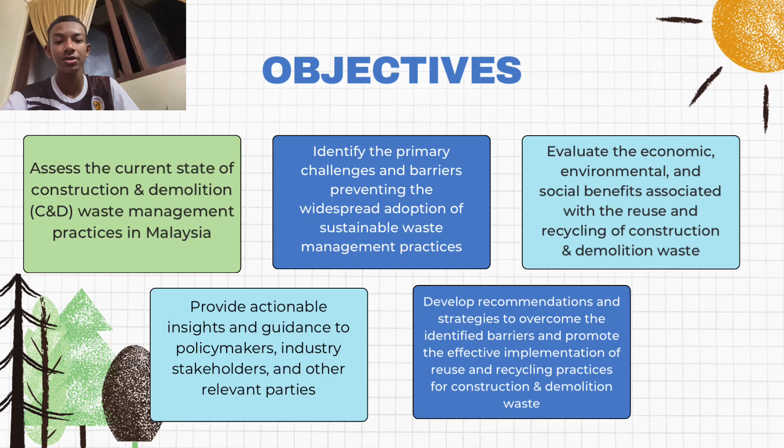The third one is to evaluate the economic, environmental, and social benefits associated with the reuse and recycling of construction and demolition waste. The fourth one is to provide actionable insights and guidance to policymakers, industry stakeholders, and other relevant parties. And lastly, to develop recommendations and strategies to overcome the identified barriers and promote the effective implementation of reuse and recycling practices for construction and demolition waste.

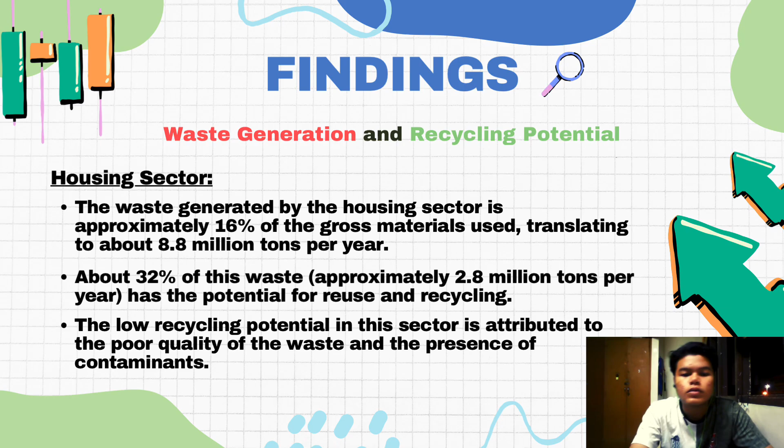The low recycling potential in this sector is attributed to the poor quality of the waste and the presence of contaminants. For high-rise building construction, the sector generates more than 10 million tons of construction waste annually, representing about 70% of the total construction waste. There is a high potential for reusability and recycling in this sector.

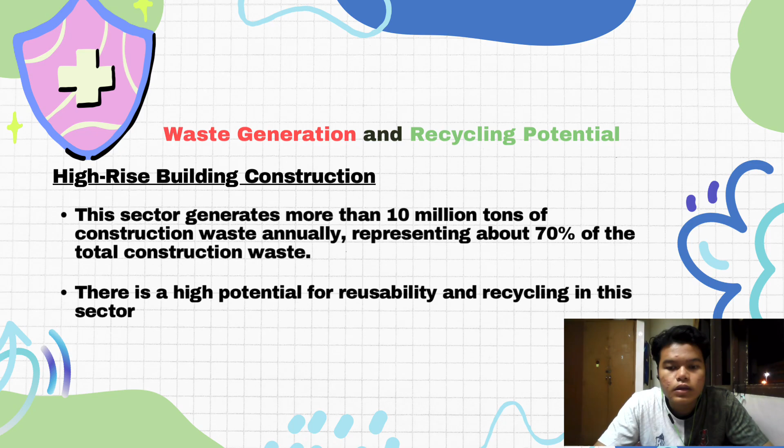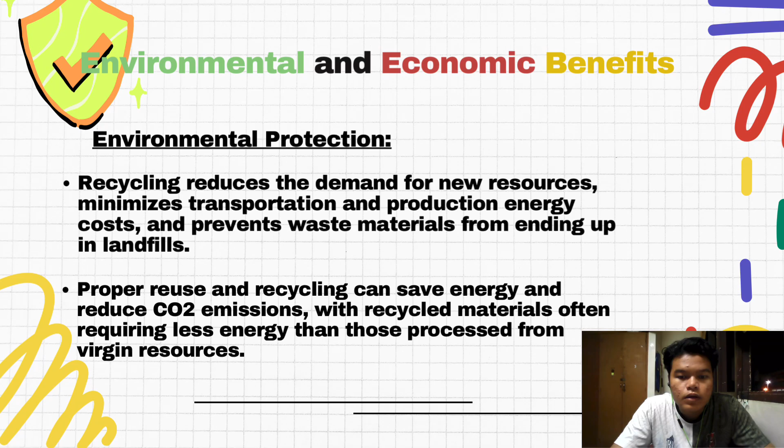The second point of our findings is the environmental and economic benefits. For environmental protection, recycling reduces the demand for new resources. It minimizes transportation and production energy costs and prevents waste materials from ending up in landfills. Proper reuse and recycling can save energy and reduce CO2, which is carbon dioxide emissions, with recycled material often requiring less energy than those processed from virgin resources.

For waste management practice, which is the economic benefit, the study emphasized the need for coordination among all stakeholders in the planning, design, and construction processes to minimize waste due to inappropriate handling. The adoption of waste recycling strategies can significantly reduce the environmental impact and the consumption of natural resources.

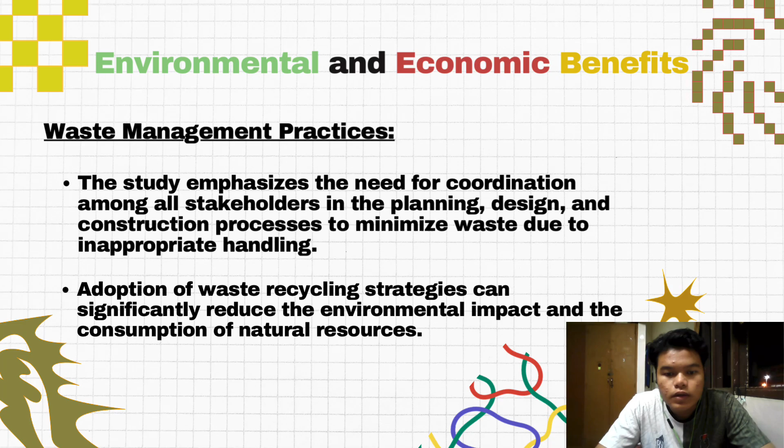The third point of our findings is the institutional mechanisms and global comparison. For our institutional mechanism, Malaysia. The country doesn't have a complete system in place to enforce less waste and more recycling in the construction industry. About 95 to 97% of all waste, including building waste, is thrown away, with just 3 to 5% being processed or recycled.

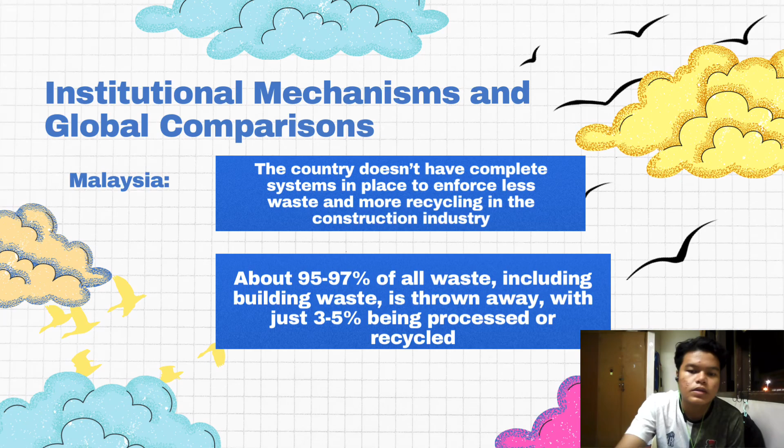For the developed countries, the paper points out laws and rules from countries like Japan, the UK, and Germany that encourage recycling and managing waste. The developed countries are producing less waste because they are promoting green practices and managing waste more effectively.

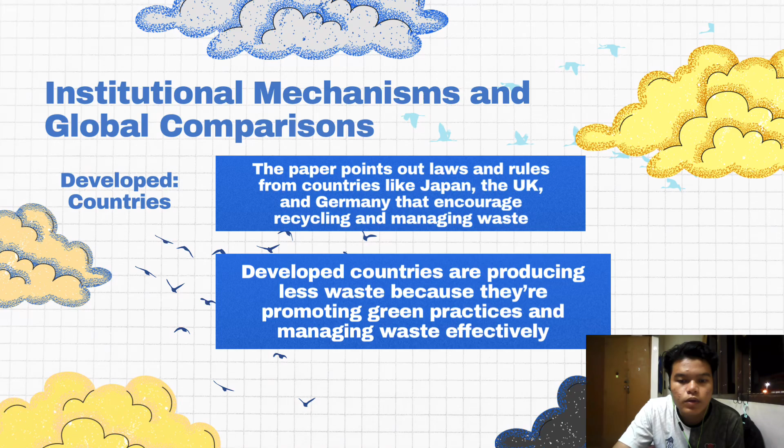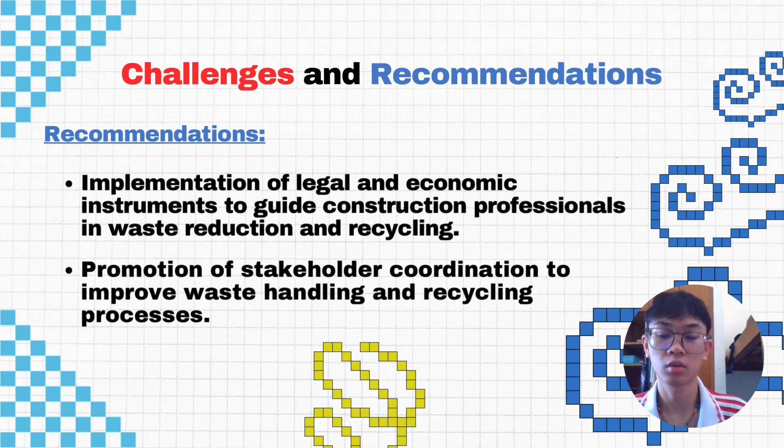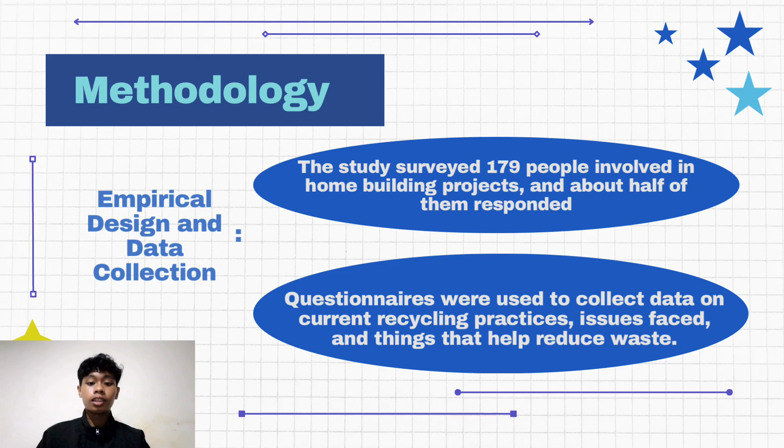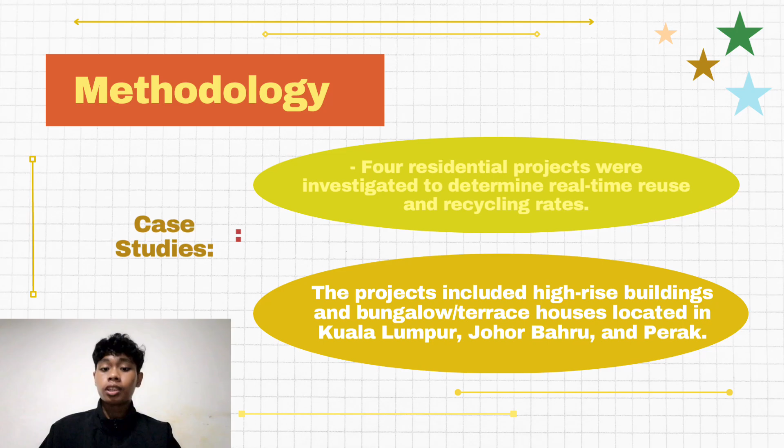Next is case studies. Four residential projects were investigated to determine real-time reuse and recycle rates. The projects include high-rise buildings and bungalows or terrace houses located in Kuala Lumpur, Johor Bahru, and Perak. The last methodology is importance index factors. The study ranked four main factors for successful reuse and recycling using a 5-point scale. The Relative Importance Index (RII) was used to analyze the importance of these factors.

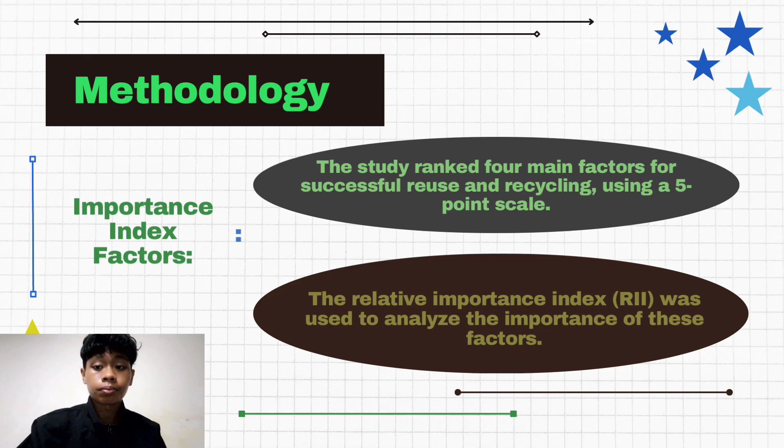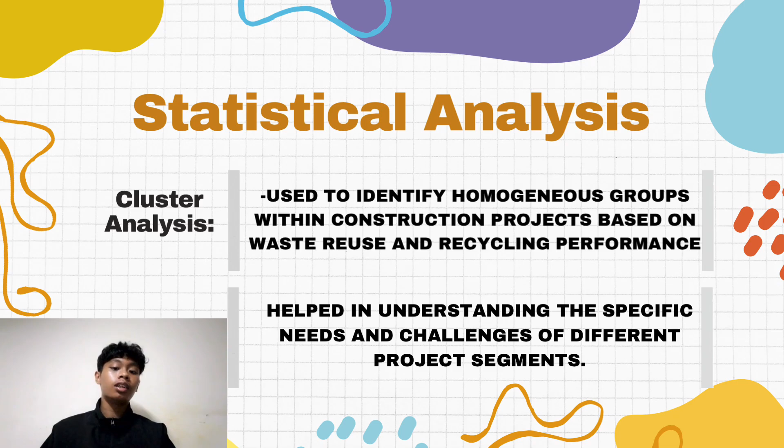Statistical analysis: cluster analysis was used to identify homogeneous groups within construction projects based on waste reuse and recycling performance. It helped in understanding the specific needs and challenges for different project segments.